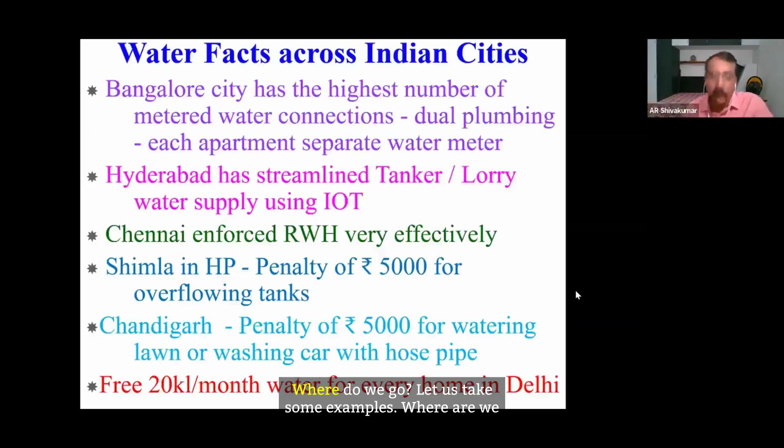Let us take some examples - where are we heading? Hydro-pneumatic water supply - many of you will not agree with me, but I'll tell you my experience. Zero water storage. I've been working in the last 10 years in some villa plots, a premium group, high-end villas in Bangalore, large apartments, with zero water storage in any of these homes. Somewhere somebody stores it and then there's pressurized water pumped all the way to their house.

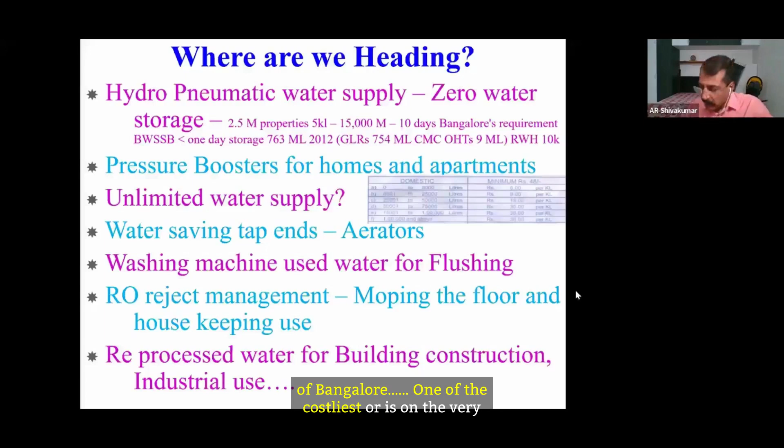In the east of Bangalore, one of the costliest, very high-end villa communities, for the last 10 years we've been trying to get them to implement conservation measures, rainwater harvesting, whatnot. None of these houses have a tank to store their rainwater. If you ask them to recharge into the ground, the builder has absolutely no clue how to do it, and most have basements built like that because these people returned from the US and built several floors, with one floor below ground level. How do we recharge water?

The basement gets flooded, leaking all over, nowhere to go. The builder, the promoter of the property, said no, you cannot do anything inside the property - we have done rainwater harvesting. In a peripheral area, there are a few small holes built for groundwater recharge. But why only for those villas? Many large apartments have this hydro-pneumatic supply with no storage that can compensate for the requirement.

Take for example Bangalore city itself. Recently the Chief Secretary, because of the BWSSB initiative and the policy which I was part of drafting, mandated every square meter of roof area should have at least 20 liters of water storage. It got changed - the Chief Secretary recently announced it should be 60 liters for every square meter of roof area. The building should have rainwater harvesting and storage place.

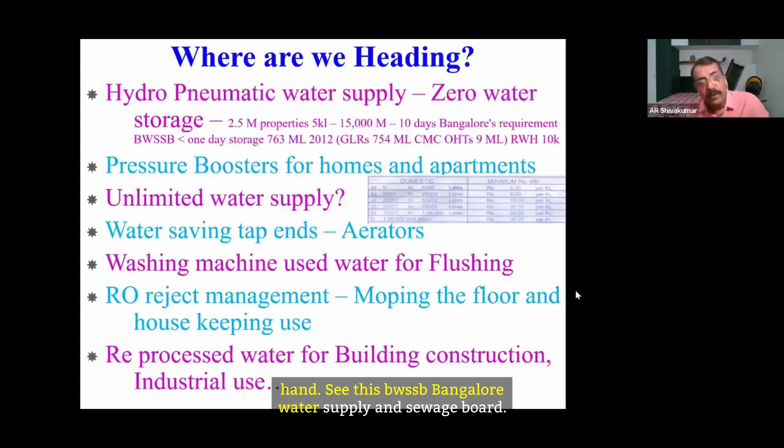The laws are there. On the other hand, see this BWSSB, Bangalore Water Supply and Sewerage Board. I'll come to the number which Hari wants to share about the electricity consumption. But what is the storage they have? I know every location. I can give you on the map the storage places of BWSSB.

They are called GLRs, ground level reservoirs, and CMCs have overhead tanks, totaling 763 million liters. Maybe they have added a couple more. You know how much storage that is? Less than 1 day's storage for Bangalore.

My God, I pray nothing should happen. Yeah, if something happens to the supply system, Bangalore will go dry, the entire Bangalore will go dry in 12 hours' time. There is no water stored anywhere to ensure even 1 day's supply.

From the river, it has to be pumped, and most of these storage places called GLRs, ground level reservoirs, or OHTs, have just a transit point of pipe. Water comes in, water goes out. They will never get filled. No tank gets filled, and no water is stored.

Rainwater harvesting, 10,000. My God, this is what is happening. Can you imagine the total kind of storage we talk about, and then where is the storage?

Pressure boosters for homes and apartments—oh, this is another waste. On one hand, we try to save water with water-saving tap ends, aerators, pressure regulators and all that. On the other hand, pressure boosters for homes and apartments have been promoted in such a fashion that the more pressure, the more water is dispensed, and luxury is at its peak.

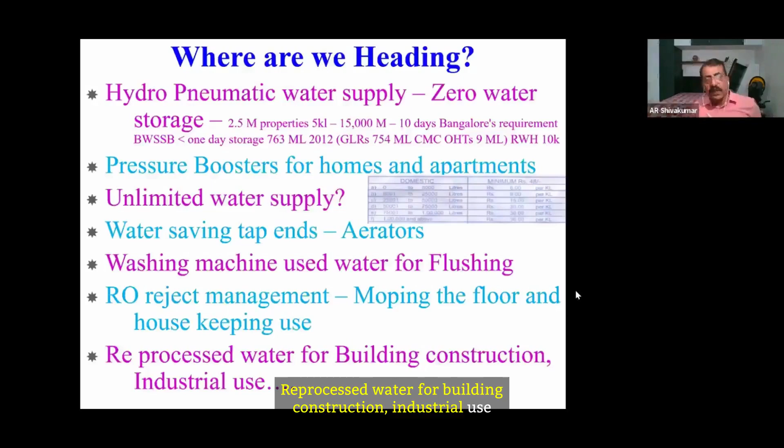Reprocessed water for building construction, industrial use and other things—you can definitely do that. There are ways which have been shown and can be done.

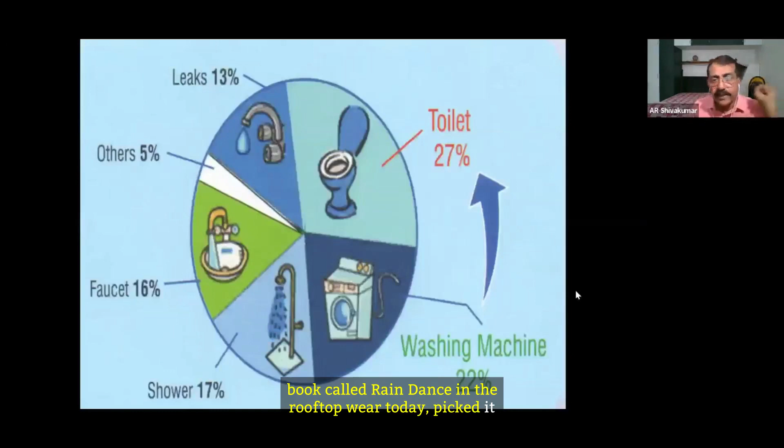See this picture, from my book called Rain Dance on the Rooftop, where I picked it up today and show that if you see the domestic usage in any house, this is the pattern you follow. Washing machine water is 22% and toilet flush use is 27%. Can you see some correlation here?

If you see the water which comes out of the washing machine, it's just soap water, there isn't much dirt—of course, we don't go work in the fields so much now with our clothes. That water with the detergent, if you use it for flushing, is the best thing to do because you don't need other detergent to clean your toilet bowl.

I have been doing it for the last 28 years. My family has been pushed to do all this. I will tell you later about these things.

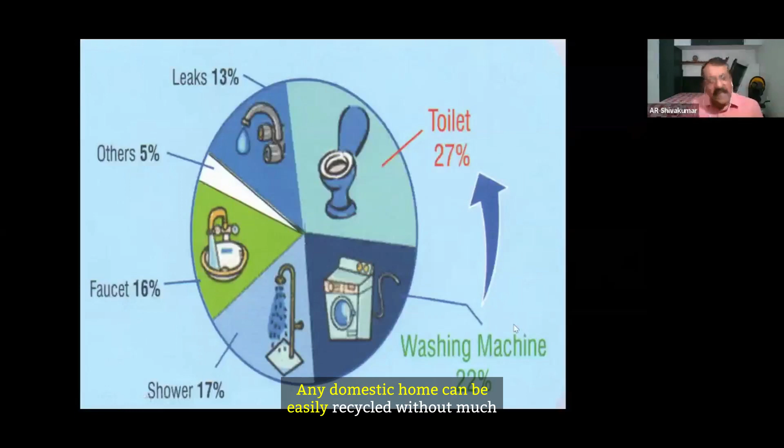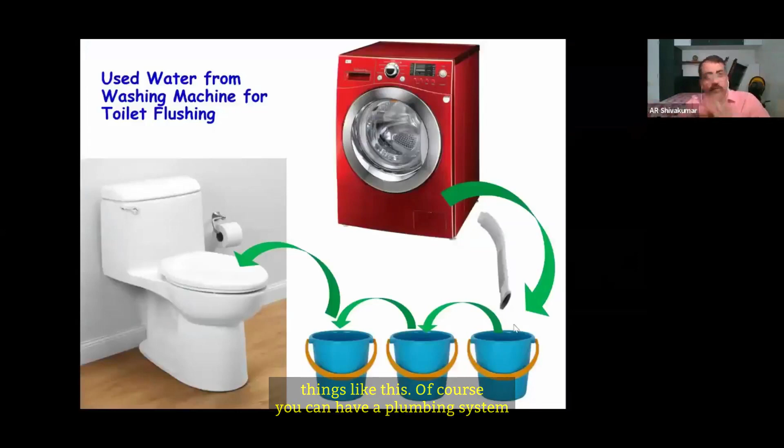Can you see here? 50% of the water in any domestic home can easily be recycled without very sophisticated treatment plants—simple things like this. Of course, you can have a plumbing system to do flushing and all that, but the concept is the same: kitchen water for gardening and other things.

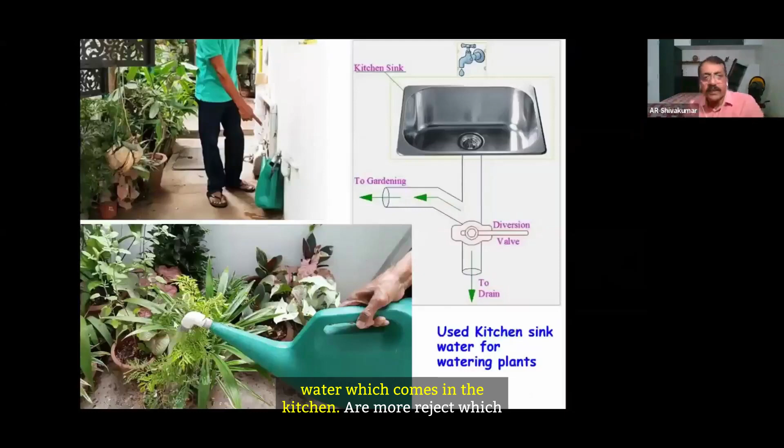Most of you know that plants are better off with such masala water which comes from the kitchen, and there's also the RO reject which I talked about.

What is the strategy for any city? Why Bangalore? We can have something like 50% of the water coming from a dam and a river, because our density of usage, or the concentration, has gone up. So you have to depend on dam, river, lakes and such kinds of things.

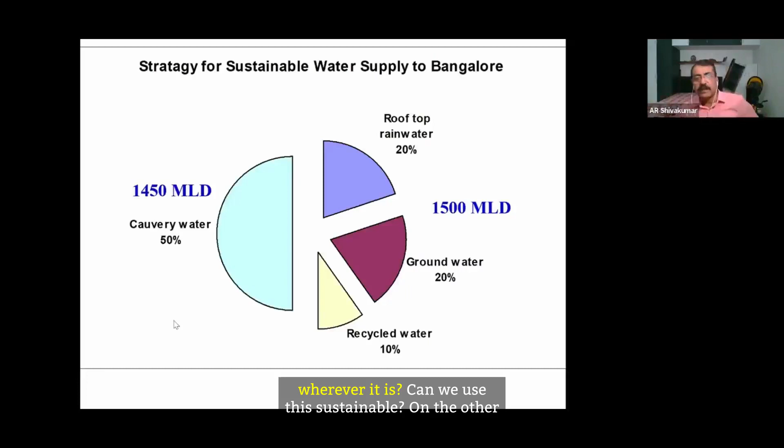So other users—can we afford to neglect these things? Rooftop rainwater harvesting: 20% can definitely, very easily, be these figures we can get. Groundwater which can be extracted sustainably, recharged to the ground and taken out—it's like your fixed deposits. At least 10% can be reused back. Every home, every apartment, every utility, wherever it is—can we use this sustainably?

On the other hand, what are we looking at from our service providers? Bangalore's water supply is 1,450 million liters which comes to Bangalore. 41% is unaccounted for—this is from their own books. 35% is domestic. That means more than what we use in our domestic sector, nobody knows where it goes.

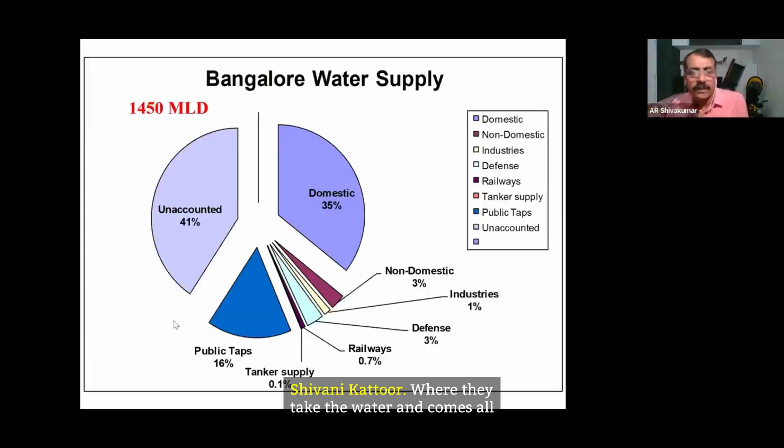There are two kinds of losses. One is the loss from the reservoir or the river, like Shivanekatu or wherever they take the water, all the way to Bangalore, where there are large GLRs, ground level reservoirs. In between, the loss is only 2.5 to 3%. That means the bulk of the losses are within the city, and I don't know how these things happen.

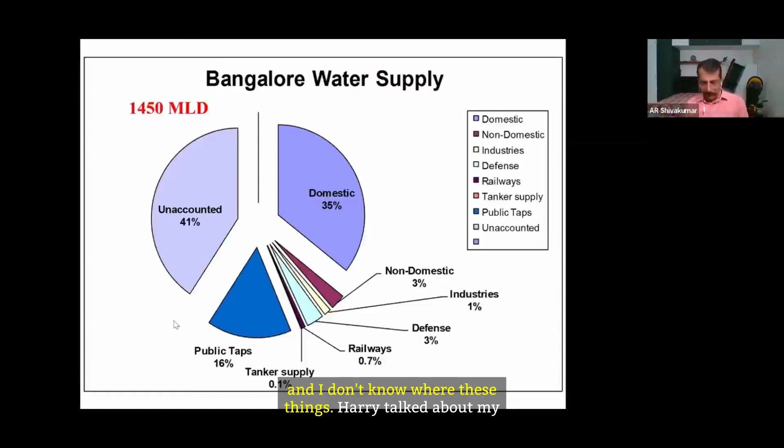Of course, Hari talked about my house. In '94, I built this house. My family and I took a decision—we will not take a water connection, and the house has to be built using rainwater, house construction included.

One year before that, I sat on the empty plot of 40 feet by 60 feet. Every day, whenever it rained, I went and measured how much it rains and how much water percolates in a square meter of area, how this can be stored in the groundwater, and what the groundwater level is. It's a long story now.

For close to three decades, my family in this house has depended on 100% rainwater for all our needs, and we use only around 100 units of power—80 to 100 kilowatt hours of electricity—for all our luxury. That's because of various other factors which follow from that.

This house is just an example, because I have nearly 1,50,000 homes in Bangalore to study, from this 100% rainwater without any other supply, to whatever percentage comes from the rain versus the city supply or borewells. We have 1.5 lakh such homes.

Revised building bylaws - what utilities and city managers can do. In 2003, BBMP made the building bylaw, and I was part of that. Many of you sitting here may have been part of this or supported this. The building bylaw of the city had this provision.

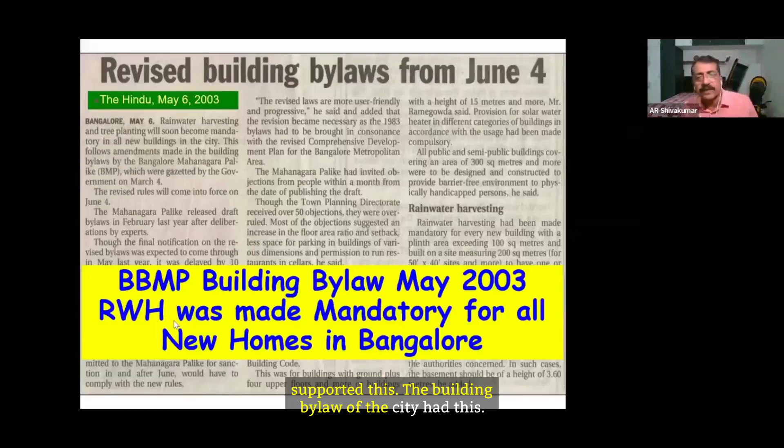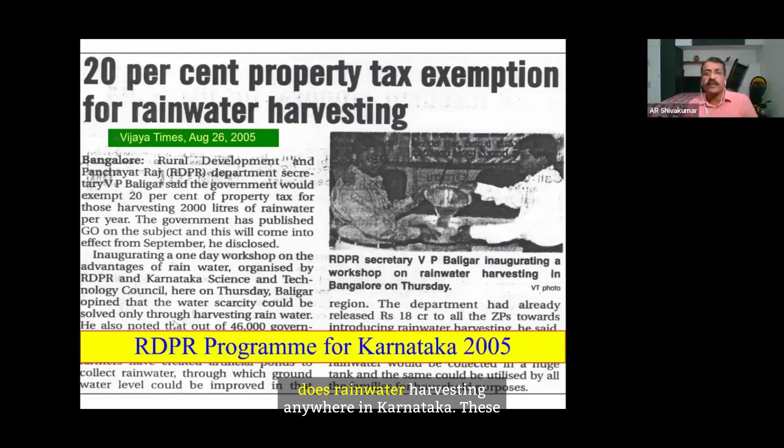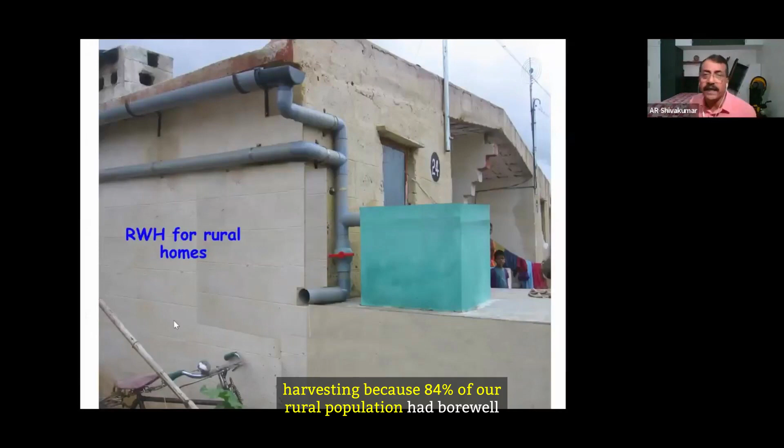Then the incentive schemes through RDPR and others, even for the rural area - in 2005, we had a 20% tax rebate for anybody who does rainwater harvesting anywhere in Karnataka in the rural area. These are some examples where we have been doing rainwater harvesting, because 84% of our rural population had borewell water which has high fluoride content and other contaminants in it.

These were the simple examples. Some of these tanks have not gone dry in several, close to 8 to 10 years, because they use this rainwater only for drinking and cooking. They generate their own water.

Government shows the way. Yes, we said that before - showing, making others do it, and having very strict measures. Let us look at some examples across the city.

From Vidhana Soudha, we have done rainwater harvesting, and even today it has been used. High Court, Karnataka - many such examples. Rainwater harvesting became mandatory from BWSSB stepped in from 2009. Yes, from that day till now, we have very good examples and the policy to do rainwater harvesting.

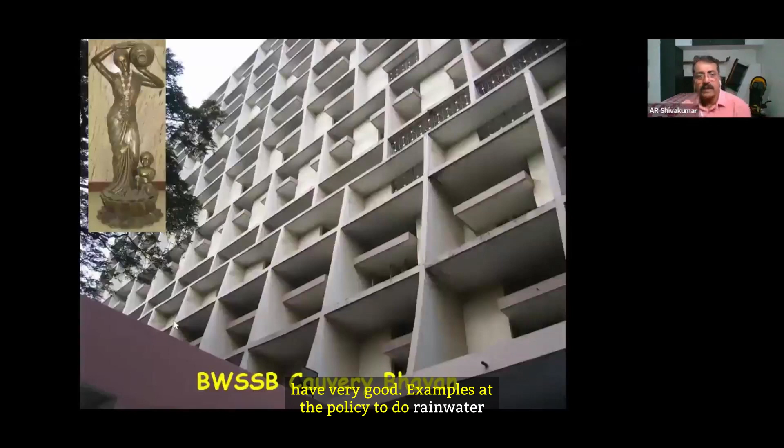First, all the water supply utility buildings of Bangalore have rainwater harvesting. Before telling others, we should have it ourselves. Whoever visits these places should know what rainwater harvesting is, in different forms. There are a dozen kinds of filters developed by various people for rooftop rainwater, and they're all installed in these places for groundwater recharge, and they use the water and then show it.

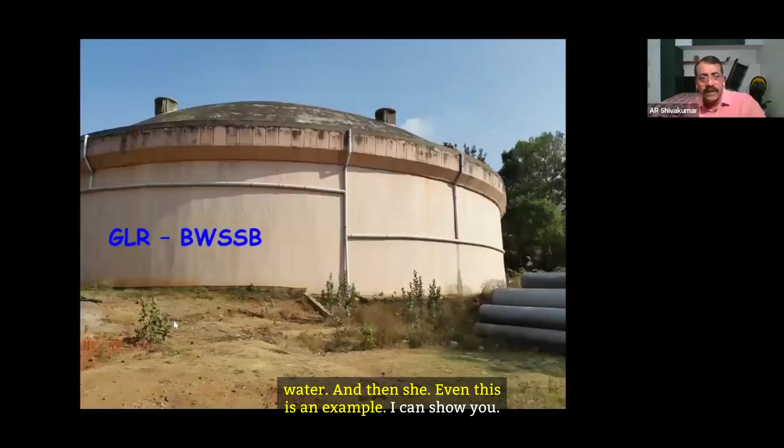Even this is an example I can show you - we did not spare even the GLRs, ground level reservoirs, dotted across Bangalore. We harvested water from their own rooftops, filtered it, and pumped it back into the same reservoir where the Kaveri water is mixed. So now in Bangalore, we have a blend of Kaveri water and, to a certain extent, rainwater supply.

Chief Minister's home office, Krishna, has rainwater harvesting, and many people, even foreign dignitaries, come here and see we have rainwater harvesting there. And yes, the country's first rainwater harvesting theme park came into existence in 2012 in Bangalore, Jayanagar - this is the one. There is enough information available, enough examples.

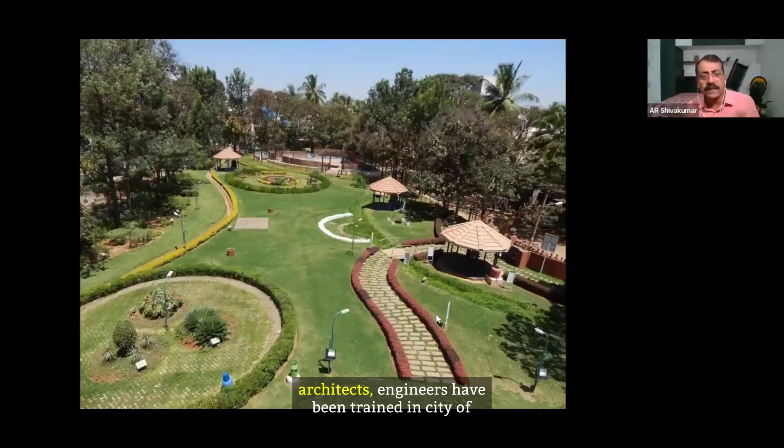There are training programs - over 2,380 plumbing contractors, architects and engineers have been trained in the city of Bangalore, where there are only 200 wards or something like that. There's enough information, enough push to do all this. But how far can we walk?

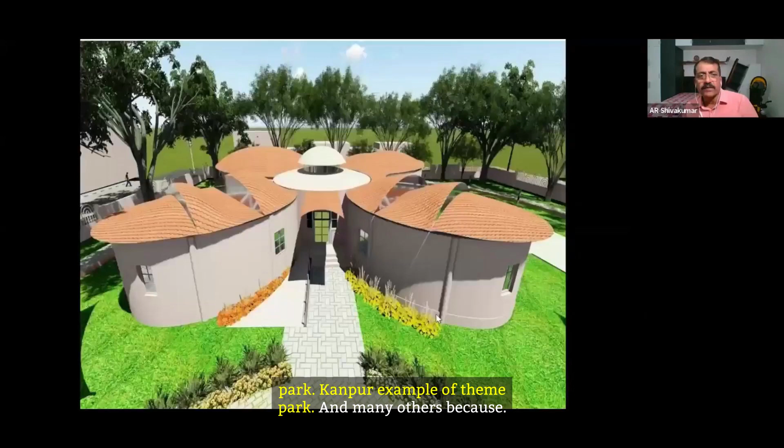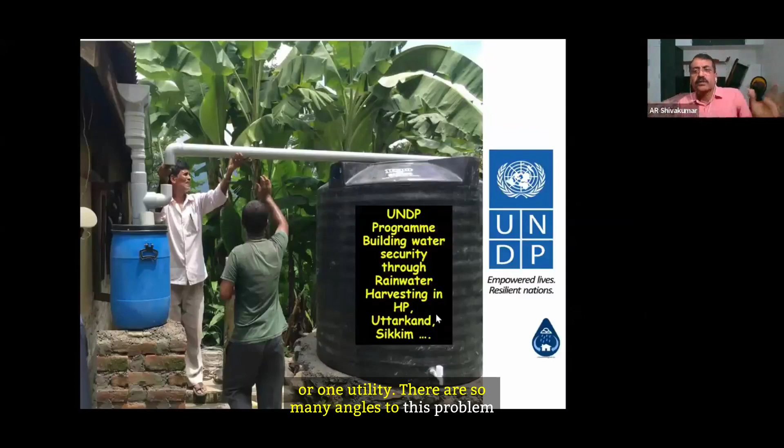Yes, Hyderabad's example of a theme park, and Kanpur's example of a theme park. There are many others, because when I was speaking to Suresh yesterday, I told him there are many agencies which have joined - it's not one individual, one organization, or one utility. There are so many angles to this problem where we have answers.

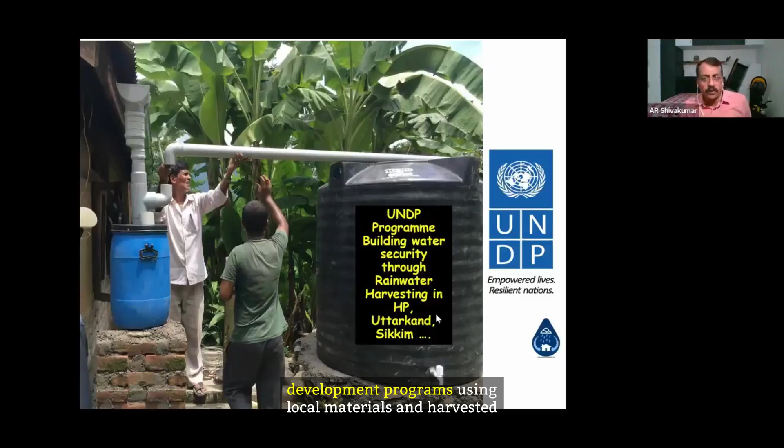UNDP - the entire Northeast, all the states, plus the Himalayan belt - we did very good skill development programs using local material and harvested water for their daily drinking.

Can we have something called a porous city concept? We should - now most of the cities are becoming impervious. They are not porous at all, totally cement, concrete and all that.

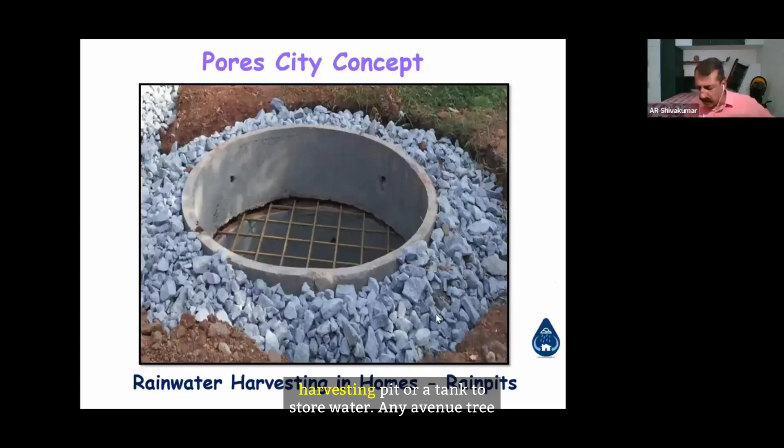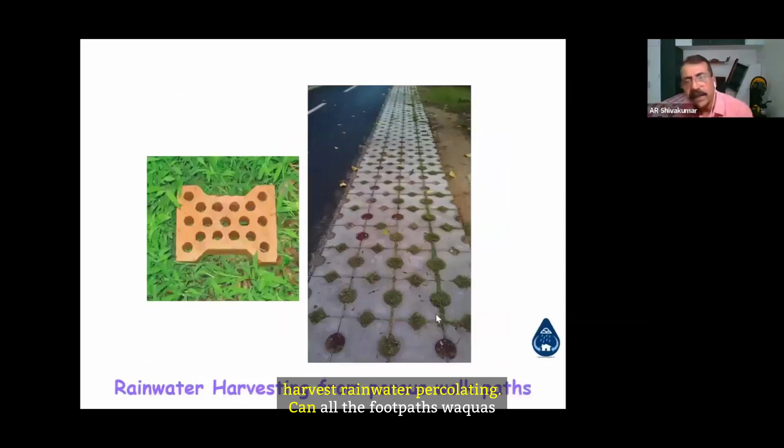Every house should have a small rainwater harvesting pit or a tank to store water. Any avenue tree, anywhere in the city, should have a basin to harvest percolating rainwater. Can all the footpaths, walkpaths, and paved areas of the city have a porous city concept, something like this?

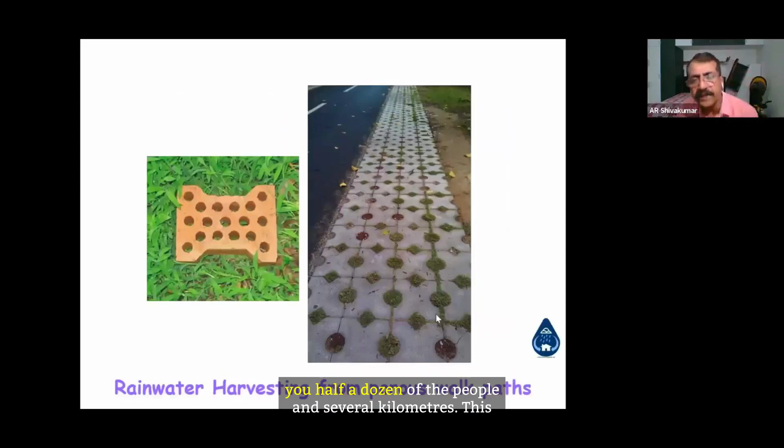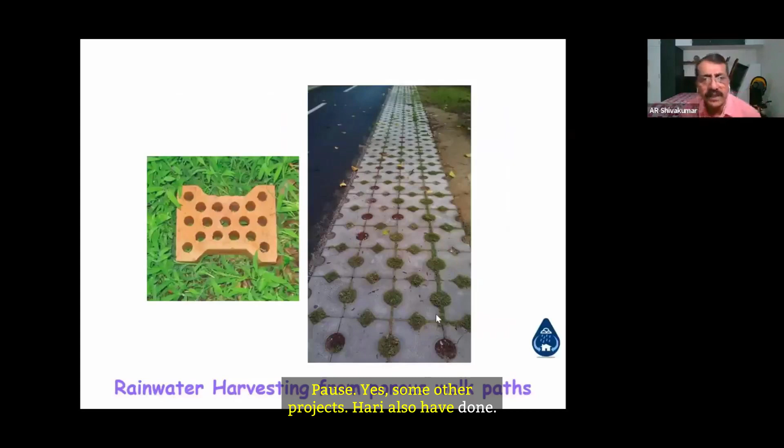There are many designs available - I can show you half a dozen of them, across several kilometers. This is in Jayanagar, a few kilometers where we have done the footpaths, and yes, some of the projects Hari has also done - the left one is taken from Hariharan's own work. The pavers have holes where the water percolates, among other things.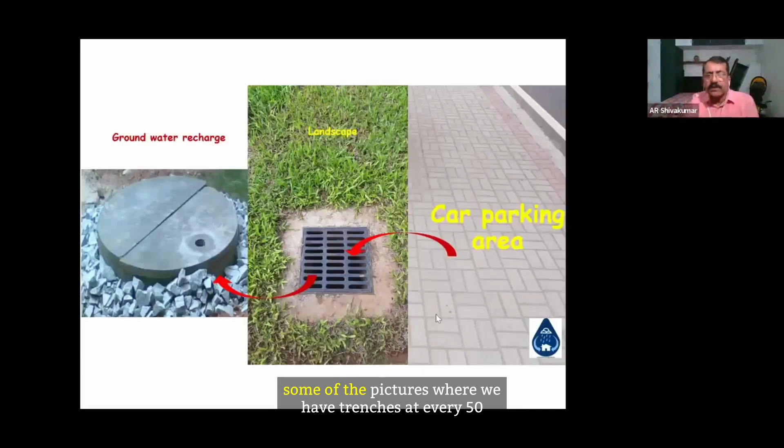So from an individual home to the stormwater drain - I'm showing some pictures where we have trenches at every 50-meter interval. From all these places, can we have a city which is porous?

City water crisis - shall we join hands to resolve it? The answer is yes. Thanks to every home in Bangalore who have done rainwater harvesting and for promoting it among their neighbors too.